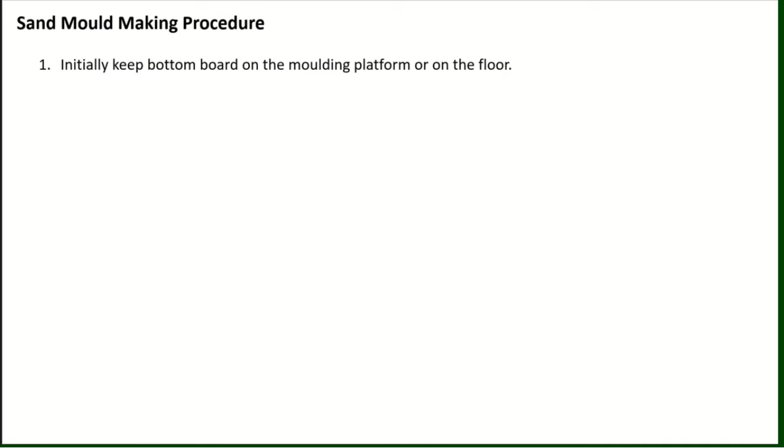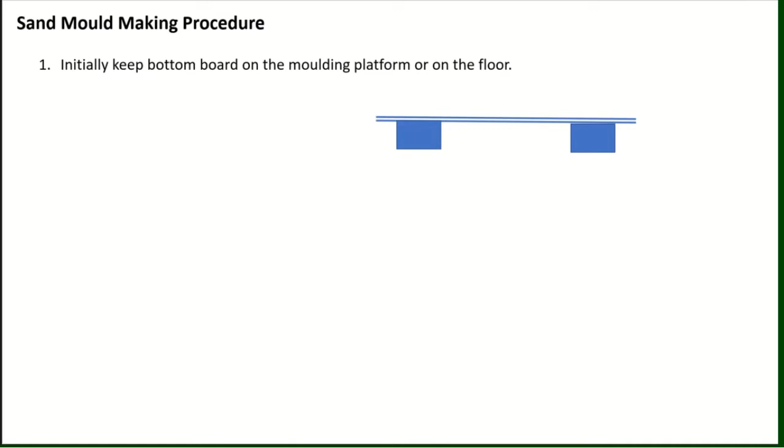Initially, keep the bottom board on the molding platform or on the floor. As you see, we can keep the bottom board on the molding platform. Once the bottom board is ready, place the drag flask upside down on the bottom board such that the pattern is at the center of the flask.

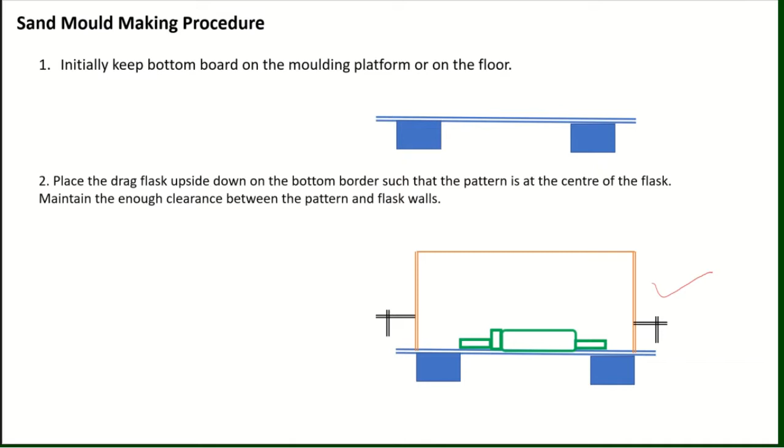Also, if you see on the bottom board, now the drag flask is placed upside down. Once it is placed, maintain enough clearance between the pattern and the flask walls. It is necessary to maintain enough clearance between the pattern and the flask walls.

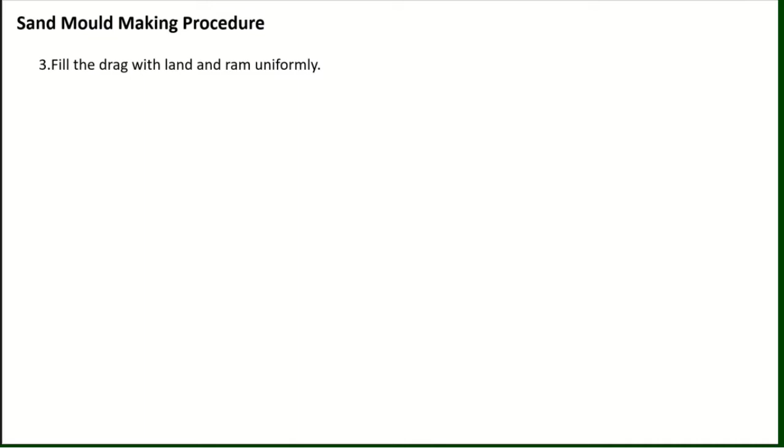Then the third step: once the upside-down drag is ready, place the sand in the drag and ram it uniformly. So now the sand is filled and it is rammed uniformly in the drag pattern.

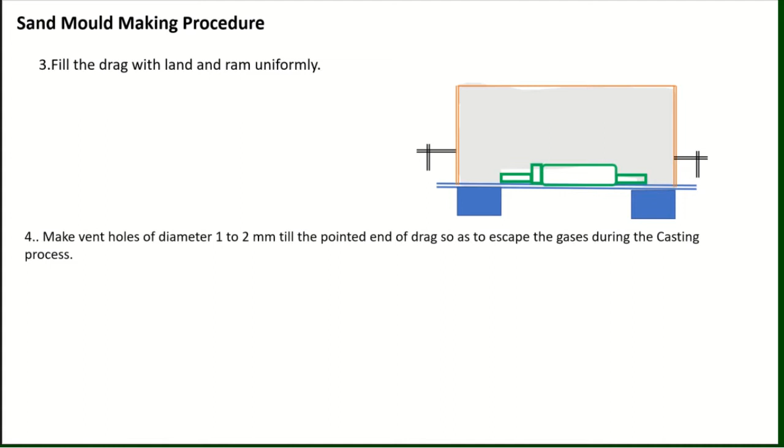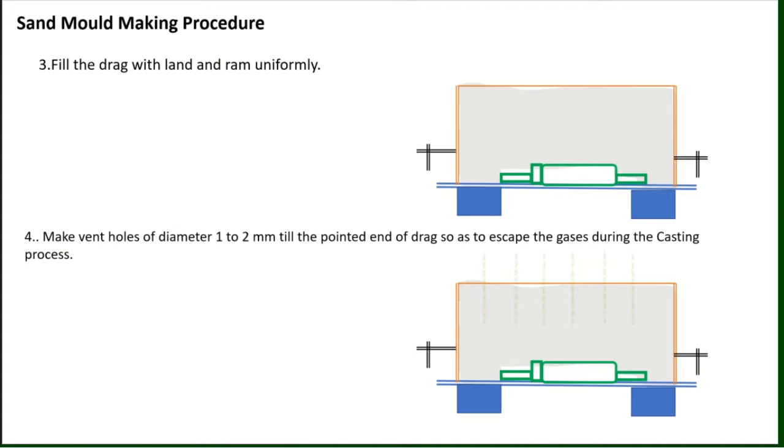Once the drag flask is ready, make some vent holes of diameter 1 to 2 mm till the pointed end of the drag, so as to let the gases escape during the casting process. The vent holes in the drag flask will be prepared like this. Now the drag is ready.

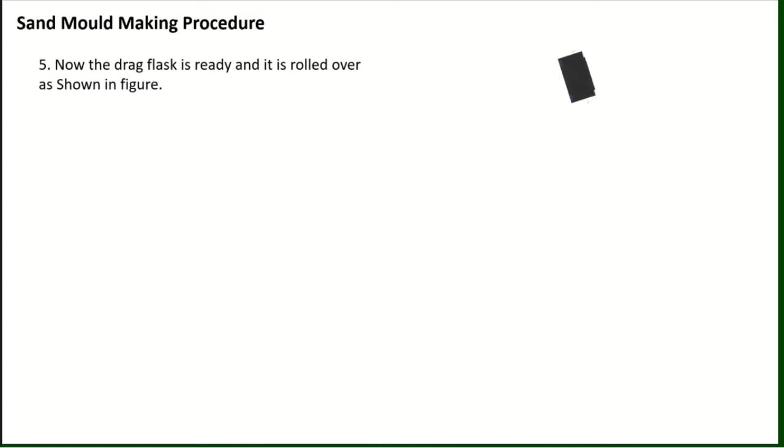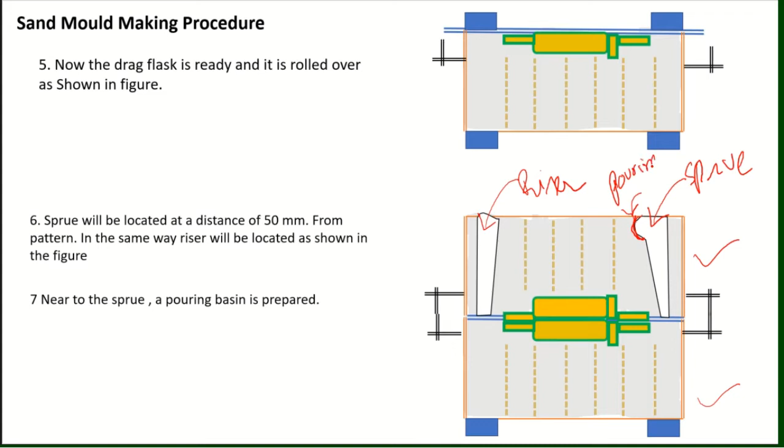Pouring basin. Now once the setup is prepared, the cope flask and drag flask are both removed with the aid of draw spikes. Once they are removed, the next step is to arrange the runner and gate in the mold. The runner and gate are prepared in order to control the flow of the liquid metal while it is reaching the mold cavity.

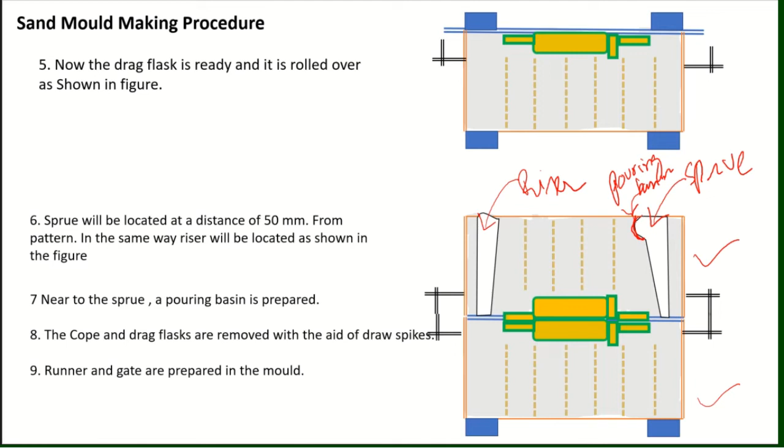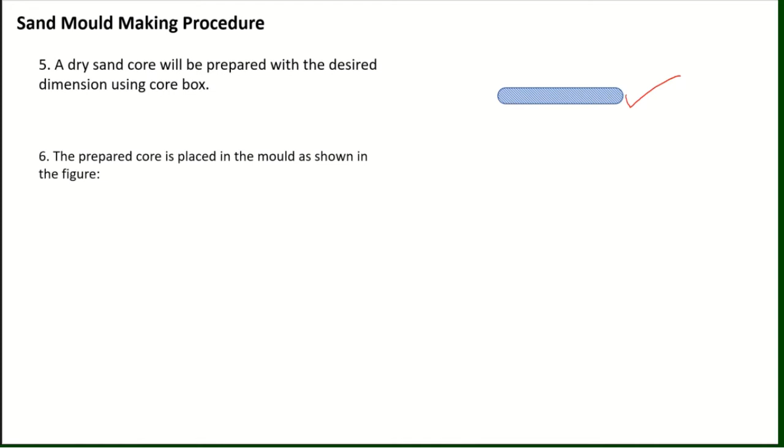So the mold cavity with runner and gate is prepared. Now a dry sand core will be prepared with the desired dimension. This is the core, and it will be placed inside the mold cavity in order to make the hollow parts. The prepared core is now placed in the mold as represented in the figure. This is the initial mold, and now the core is placed inside the mold.

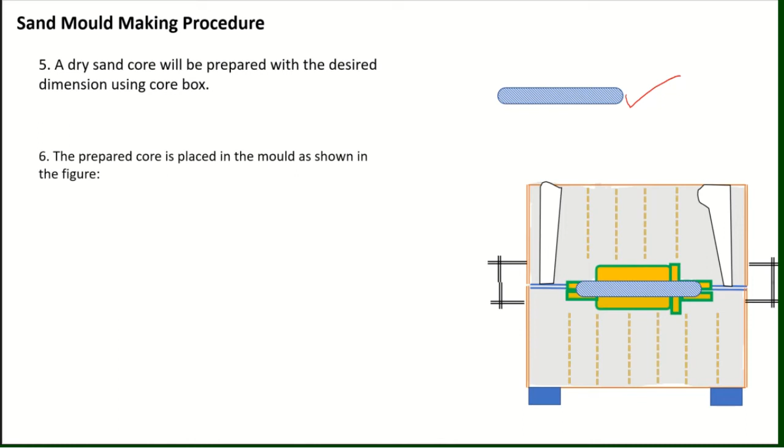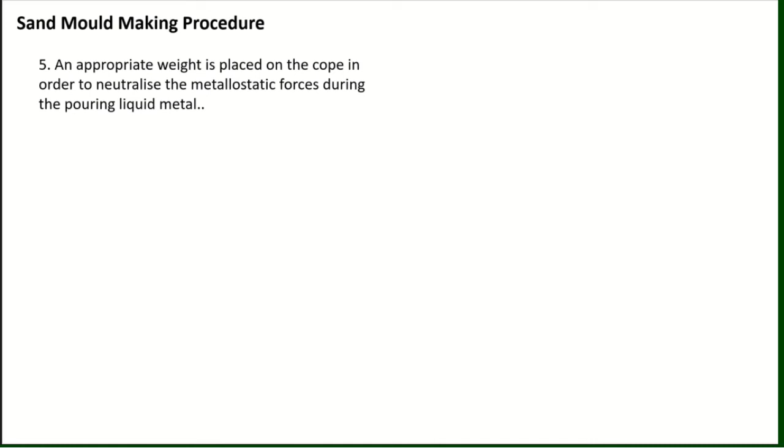After all, an appropriate weight is placed on the cope in order to neutralize the metallostatic forces during the pouring of the liquid metal. While pouring, because the liquid metal is very hot and continuously flowing through the sprue, high metallostatic forces will be developed. These forces are to be neutralized, because they may change the alignment of the cope and drag.

So to maintain proper alignment and avoid these alignment disturbances, a suitable weight will be placed on the cope as shown in the figure. Now this is the appropriate weight placed on the cope side. This is the complete setup of the sand mold making procedure. After all this procedure, the mold is ready for liquid metal pouring as shown in the figure.

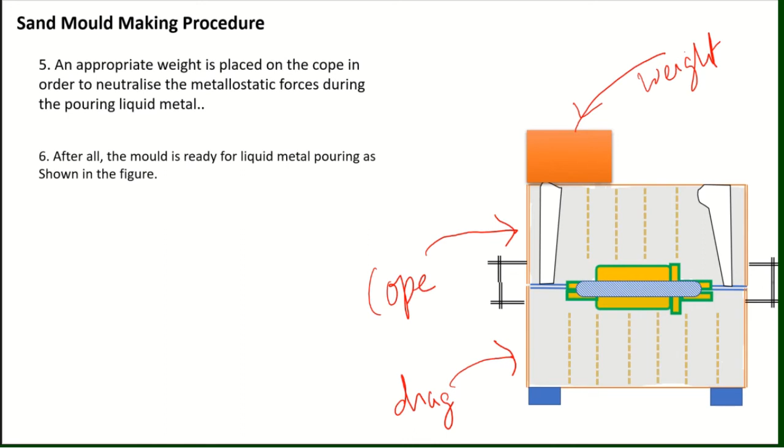Once again, let us see the complete sand mold making procedure. Initially we prepare the drag portion. This is the drag. Once the drag is prepared, we go for the preparation of the cope flask. After that, we prepare the vent holes for both cope and drag. After all, we prepare the sprue and riser.

Then the sprue and riser are prepared. The next step is to create the runner and gate at the mold cavity. After all, we have to prepare a dry sand core. Once the preparation is done, the cope and drag are to be aligned, and in order to counter the metallostatic forces of the liquid metal, a suitable weight will be placed on the cope. So the complete sand mold is ready, and now the mold is ready for liquid metal pouring.